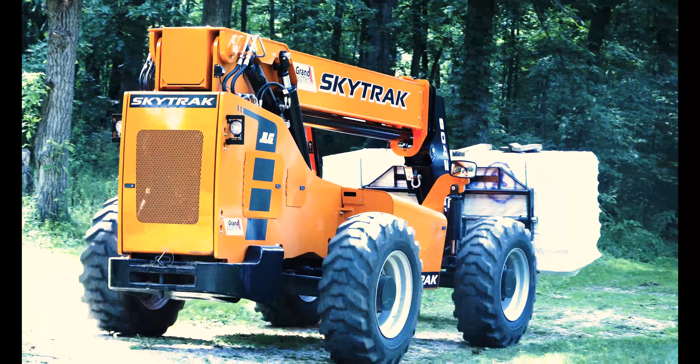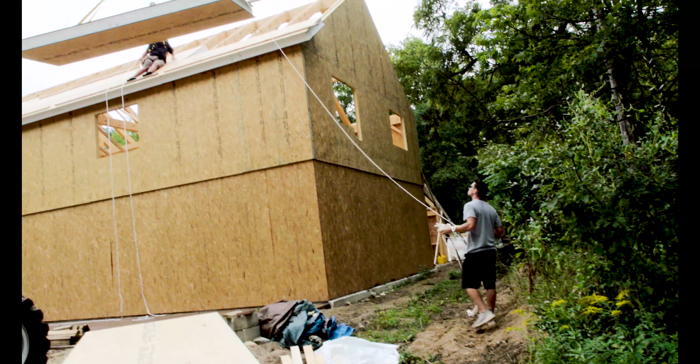The next step after erecting the timber frame is to install the structural insulated panels, or SIP panels. The panel manufacturer has provided pre-cut panels, a detailed panel layout plan, all the required adhesives, fasteners, foam, plywood splines, and, in some cases, lumber for edge blocking. In this video, we will go through the steps of installing the panels, review best practices, and offer tips and guidelines.

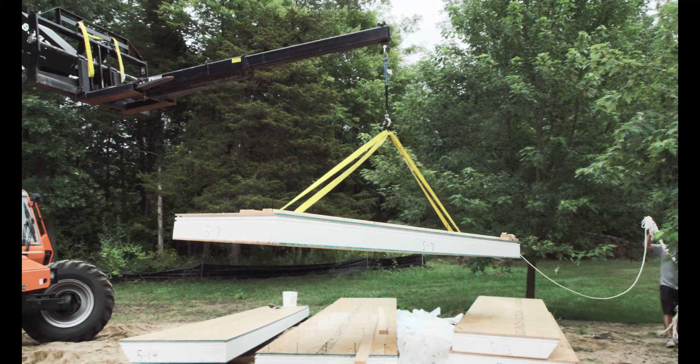A crane is the best option for installing, although the lower wall panels are effectively done by human power. With some ingenuity, the upper wall panels and roof panels can be done by hand as well. A lull with a boom attached, such as the SkyTrak used in this video, or an excavator may work well. But it depends on the height of the building, the skills of the operator, and the crew on the ground.

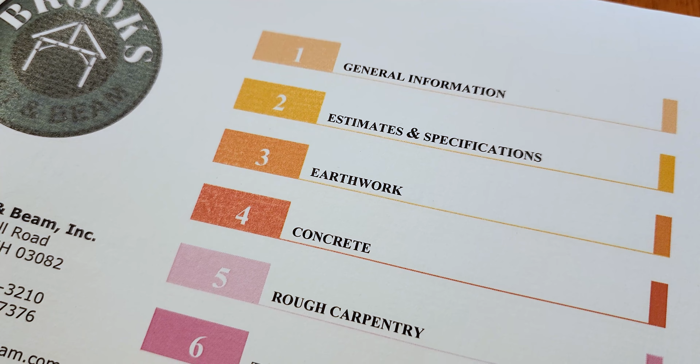The owner's manual contains extensive information about the panels, including panel types, construction details, finishing options, and building science recommendations for siding, roofing, window installation, and ventilation. You should be familiar with this information before starting on the panel installation.

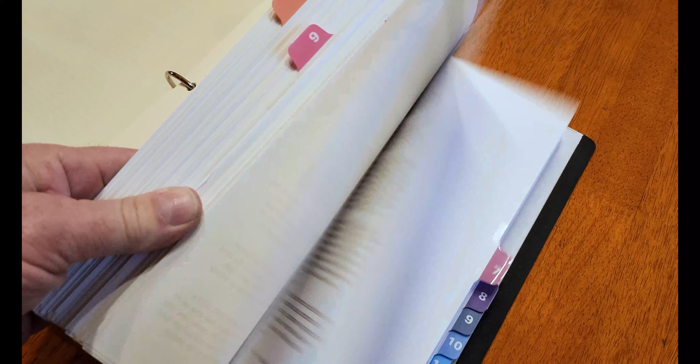In addition, your architectural plans will show building sections and wall sections which have specific panel details at the sill and eaves. And finally, the panel layout plan has at least one full page of specific details in addition to showing where each panel belongs in your building. Review the panel plans before you get started. Get familiar with the panel numbering and sequence.

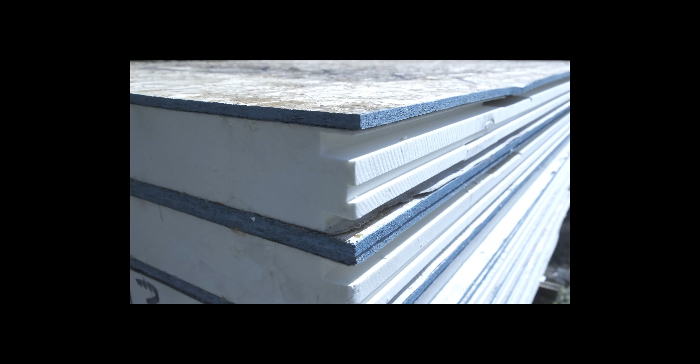You will receive several documents with your panel package. You should have a panel layout plan, which shows the timber frame outlines and the panel layout sequence. You will also have a panel pre-cut plan and a bundle list showing where to find any panel by bundle number. Each bundle of panels also has a contents sheet attached that shows which panels are in that bundle.

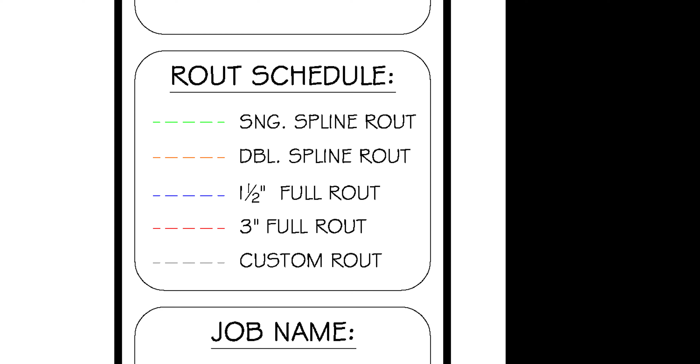The panel layout plan includes a 3D view of the project, which allows you a visual reference of the finished product. The drawing legend shows all abbreviations, line types, rout schedules, panel types, and panel identification tags. Understanding these abbreviations and tags will help you to quickly navigate the plan and identify the panels you need.

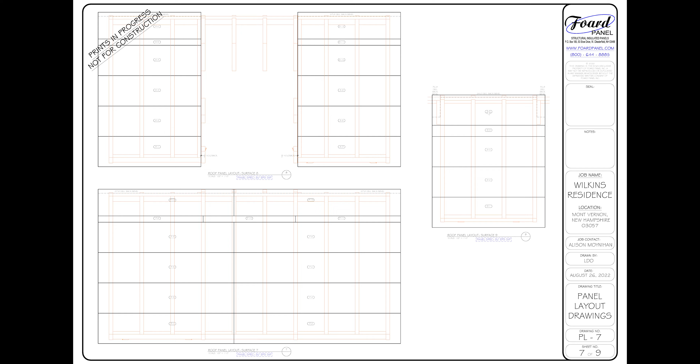The wall panel surface layout page gives you a plan view reference of the project with elevation tags for each face and arrows that tell you the surface number and on which page to find the panel layout. It also gives you a reference for where the panels join and overlap. Likewise, the roof panel layout page gives an overall view of the pattern and where the panels join. There may be an elevations page that shows the wall panels in elevation view.

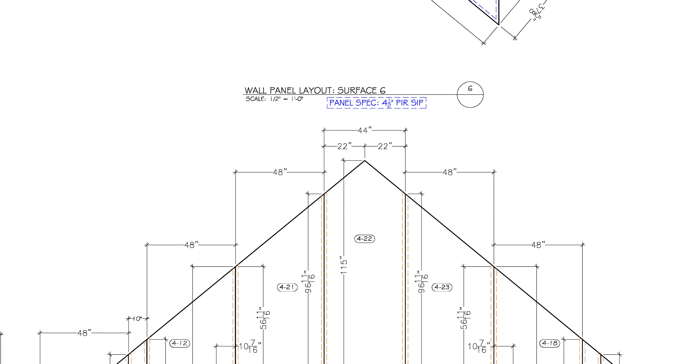After that, the detailed panel layouts are presented as surfaces with each panel number, window and door location, and panel overall dimensions. The timber frame is also represented in a lighter color line, so you can see where the panels go in relation to the frame. The roof panel layout page works the same way, with panel labels indicating the surface and number.

There will be at least one or two pages with construction details, showing how to construct the sills, joints, splines, corners, and openings. Pay particular attention to the red dots, which show the sealant applied to all foam to wood surfaces. There are details that specify fastener installation and spacing, how the corners are built, and how the roof meets the walls.

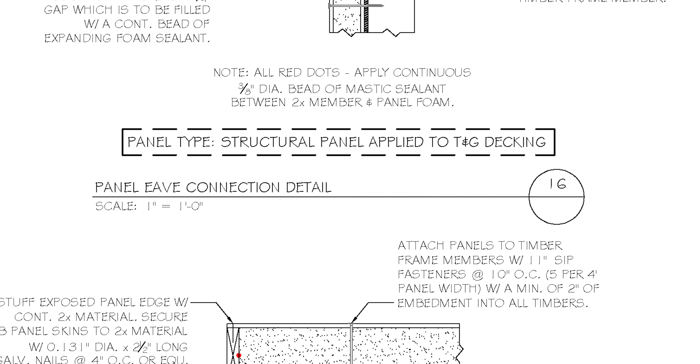There is a detail called Panel Eave Connection Detail that you will need to study. It shows the distance the roof panel extends beyond the outside of the wall panel. We will cover this in more detail in the roof panel section of this manual.

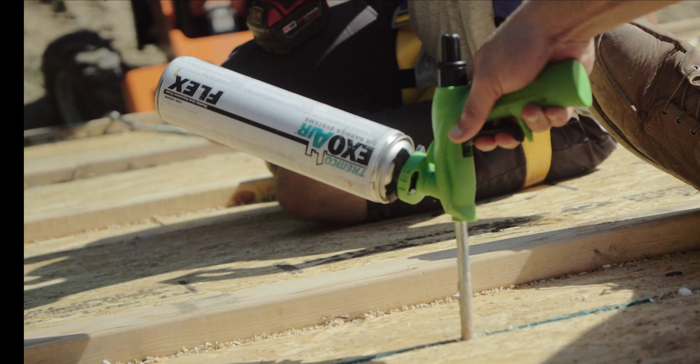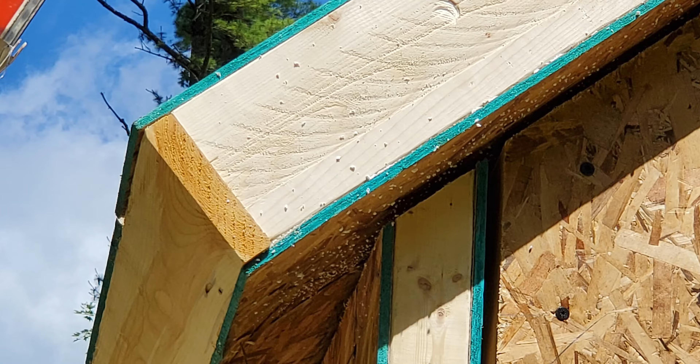There are two products that will be used to seal the panel joints: spray foam and panel mastic, or sealant. The spray foam is supplied with an applicator gun and is used to fill gaps in foam channels. A close look at the details for corners, eaves, rakes, and ridge will show a half-inch gap that is to be filled with foam. That gap may be wider because it is equal to the thickness of the furring or wall material applied behind the panels. On roofs, it is typically 3/4 of an inch, which is the thickness of 1x8 T&G pine.

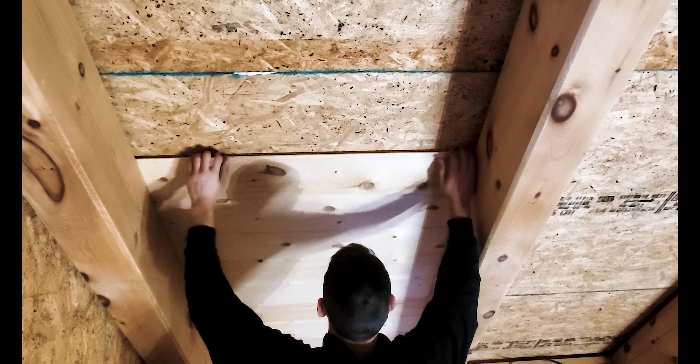All panel-to-panel joints on the walls and roof are sealed with foam, applied using the drill and fill method, which involves drilling holes at specified distances and injecting foam into the foam channel of the panel edges. We will look into this process in another video.

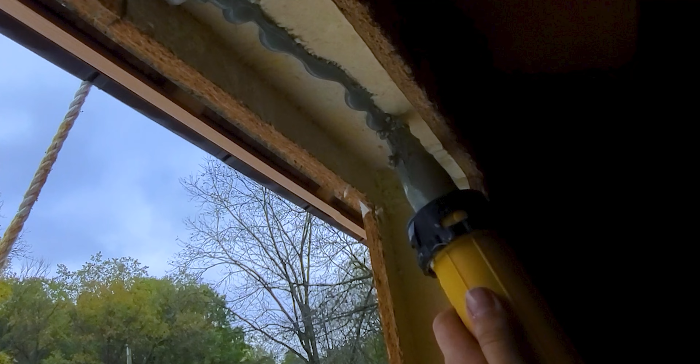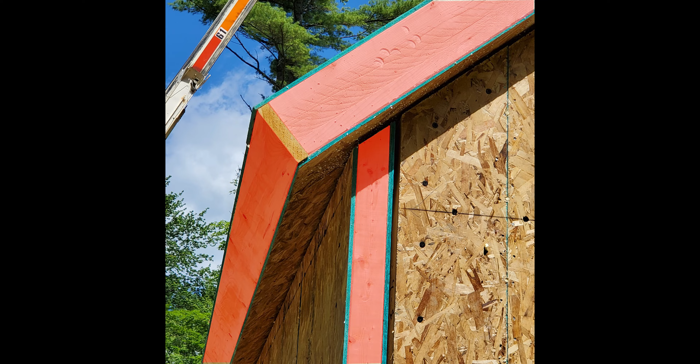The panel mastic is a special type of caulking made to bond to the foam core and is used to seal between any wood edge fillers, window and door fillers, and at the sill plate or on a subfloor. Anywhere the panel insulation meets wood in direct contact should be sealed with panel mastic.

Another use for the panel mastic is joining field cut panels. Wherever a panel scrap is used, the cut will not have a foam channel. Lay 2 beads of panel mastic on the edges and push tightly together to make a good seal.

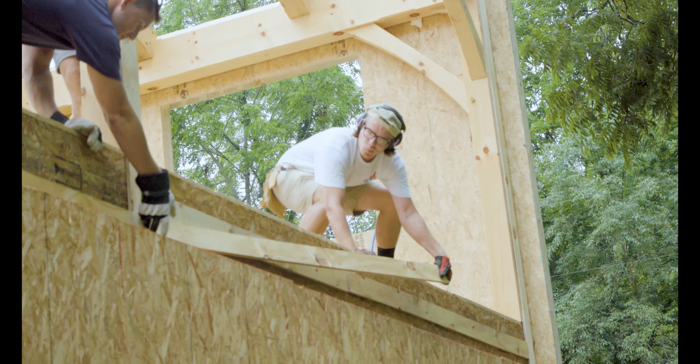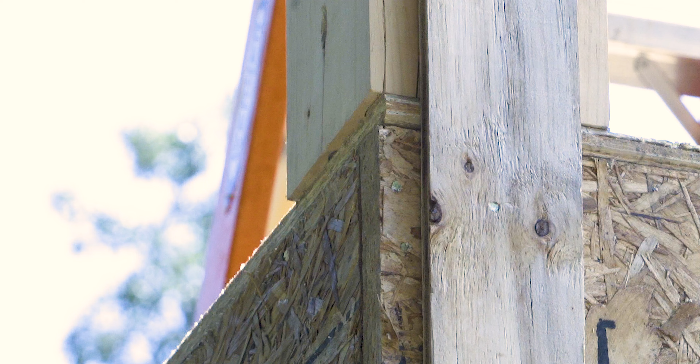Before installing the panels, you will need to pre-install the drywall or install furring strips, which will allow drywall installation later. In any case, the face of the timber frame should be flush to the face of the rim joist at every post, but this doesn't always happen. Being that the wall panels will be screwed along the bottom edge into the rim joist just above the sill, the ribbon band or furring strip should be nice and straight all the way to the sill. If not, the panel bottom will be pulled in or bulge out at the bottom, creating problems for the siding and exterior trim. Check this using a straight edge.

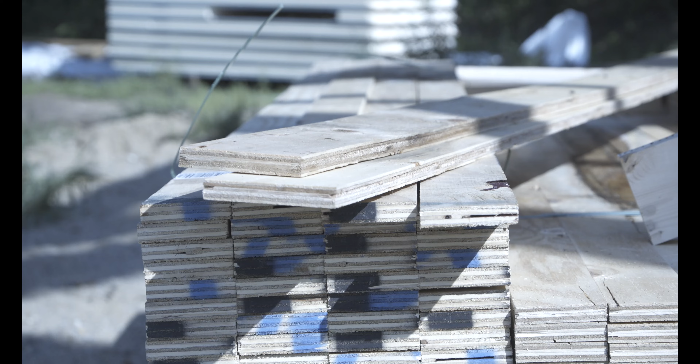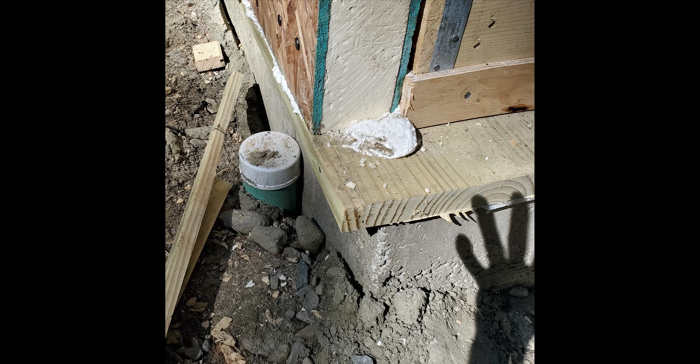If the wire chase gap is greater than 3/4 of an inch, you can use thicker stock or layers of thinner stock. If there's a severe taper, you may want to rip some 2x stock on a taper to match. If you have used a 2x12 for your sill and left it wide, now is the time to measure it out 4.5 inches from the chalked line and rip it off. If the remaining dimension is less than 4.5 inches, you will need to build out the edge so it becomes flush to the panel face.

Before any panels go up, you also need to install wires for any exterior floodlights or other fixtures that you may want. There is detailed information on wiring in the wall panel and roof panel installation sections of your manual.

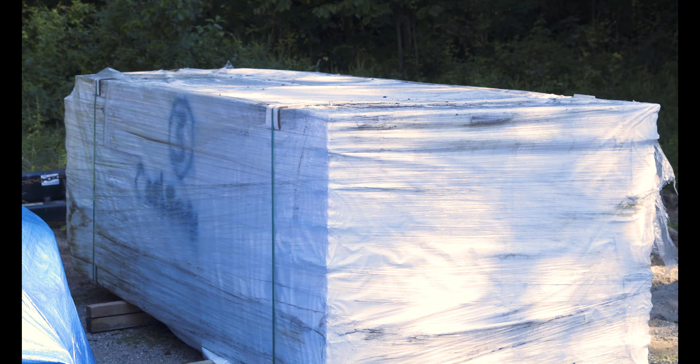Panel installation day has arrived. You may begin with a gable or an eave wall. It's up to you. If a wall has a lot of small cuts for some reason, save that wall for last, which will save time in digging through the piles looking for the cut panels.

Some wall panels can be installed by hand, with 2 or 3 workers moving the panels into position, placing the bottom edge on the sill plate and tipping the panel up into place. This is fine as long as you have a good level surface to walk on and easy access to the materials. It's more likely that you'll need to lift at least some of the panels and definitely all of the upper panels with a crane, lift, or extra manpower and ropes. The tools you'll need to have on hand are listed in your manual.

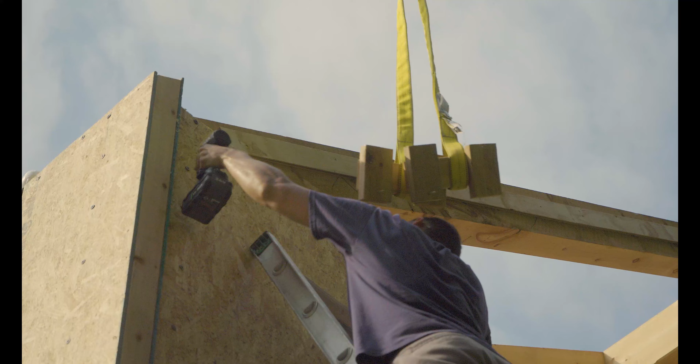The best place to start is on a corner. One face of the corner will have the panel flush to the frame and the other face overlaps. It's usually easier to start with the face flush to the frame. The panel numbering sequence will start on one end, usually left to right, and it makes sense to start there. Mark the edge of the starting panel on the panel ledge before laying down the bead of sealant. You should only lay out as much sealant as you can cover with the panel you're installing. Don't get too far ahead with the sealant, it gets messy.

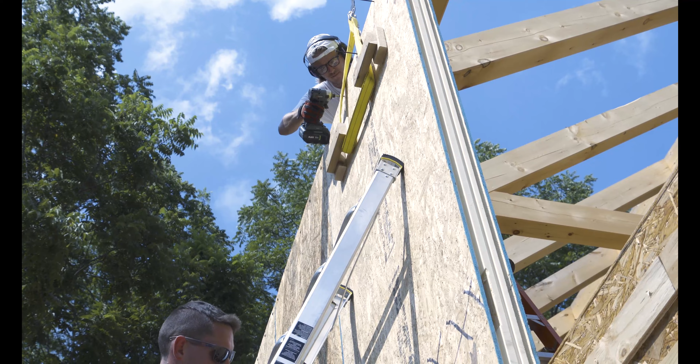Find the chosen panel and put it on sawhorses near its final destination, exterior side up, with the foot of the panel facing the building. Look at where the panel will land on the frame. Wherever it contacts the frame, you will be inserting screws. It's a good idea to start the screws in advance to save time and help get the panel secured quickly.

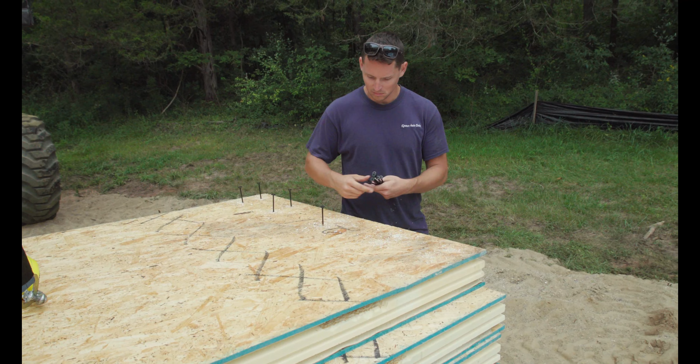While the panel is on the horses, mark out the location of the ribbon band, any posts, and the upper beam or tie. Position the screws, use 7-inch screws for 4.5-inch panels, along the bottom edge, through the ribbon band, the top edge, a beam or tie, and into any posts that the panel may land on. Check your panel plan for exact details on screw spacing.

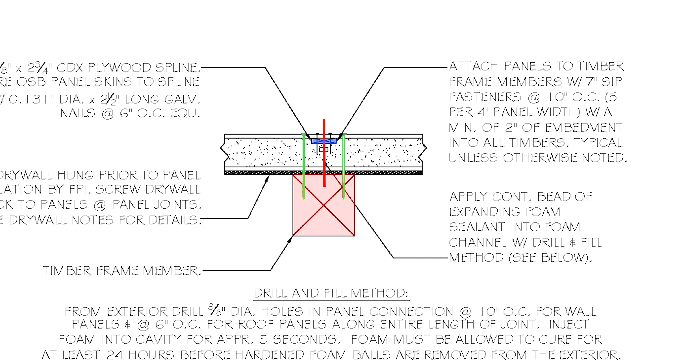Screws are usually 10 inches on center, so 5 across the bottom and 5 across the top. If the panel is half bearing on a post, keep the screws 2 inches from the edge. They need to miss the groove for the spline, but hit the post. You might want to angle these screws slightly.

If there is a knee brace, you can lay it out to get 2 screws in it. Note that the screws are pre-positioned on the ground before standing the panel. This saves time and makes ladder work safer.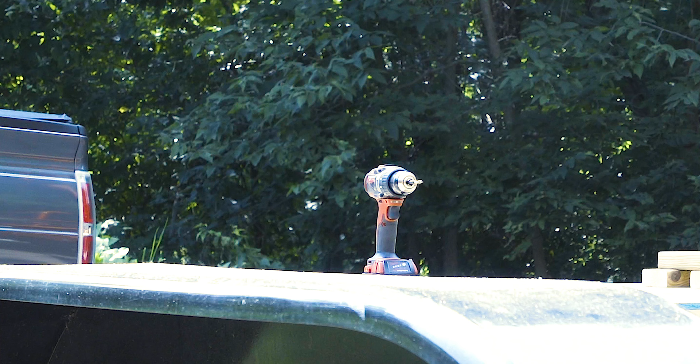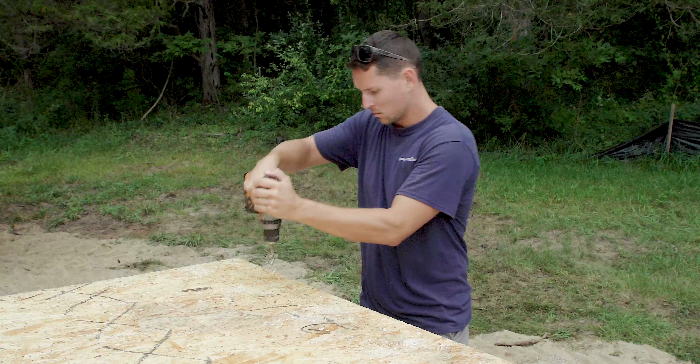Some people prefer to simply drive the screws with a drill or driver. Others have found that starting the screws with a hammer speeds up the process. Or you can drill starter holes for each screw. Some builders find this quicker and easier as the screws tend to vibrate and bounce when hit with a hammer, depending on the hardness of the OSB used on the panels for each building.

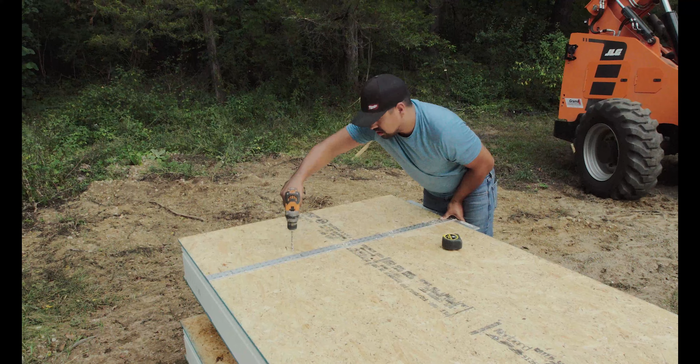We simply laid a scrap piece of furring strip across the panel and drew a line before drilling. The furring strip is just the width needed to put the line where it needs to be, without measuring each time. Or use a drywall square at the position needed and drill along it, or mark a line along the square and drill on that line.

Then, just push the screws into the foam at the angle needed, and they will be held in place for when you're on a ladder or leaning out in the air, and only have one hand available to drive them in with your drill or driver. Remember to use the supplied 7-inch screws for the 4.5-inch wall panels. The longer screws supplied are used on the thicker roof panels.

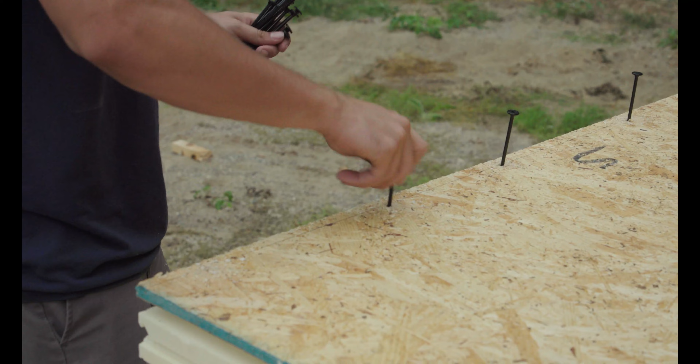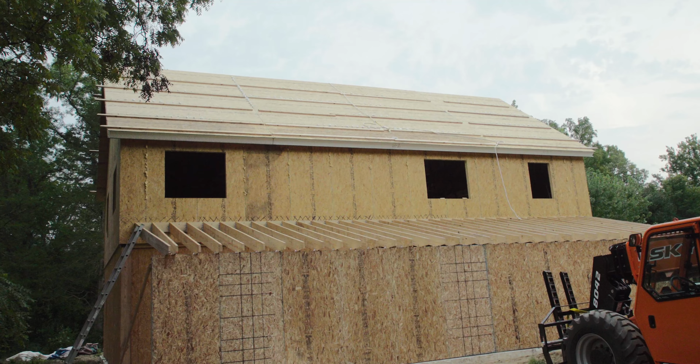Splines are strips of plywood or OSB that are supplied in a bundle and are used to join the individual panels together to create a continuous surface. The spline is inserted into the channel cut for it by the factory. Most installers find it easiest to put up 2 or 3 panels, then go back and slide the vertical splines down into the slot from above. Make sure the slot is completely filled. The splines can be screwed or nailed with a nail gun to finish.

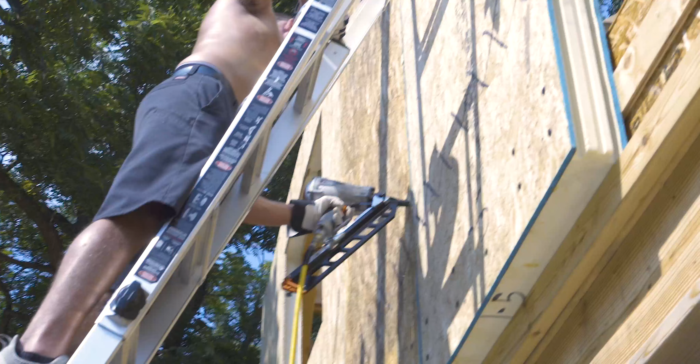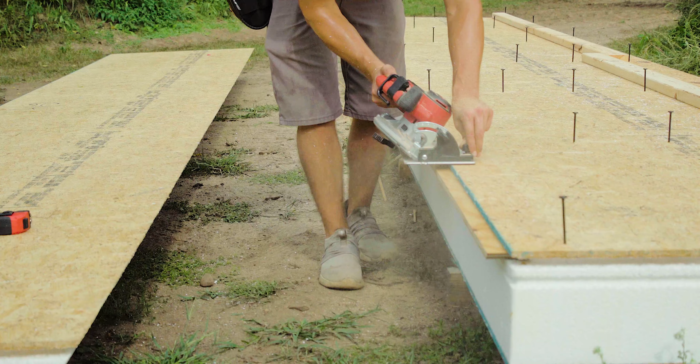Sometimes it's helpful to screw one edge of the spline into place in the panel while it's still on the ground, pulling it up flat to the backside of the panel OSB. This aligns things so that the next panel slides right over the spline without jamming. Other times, it's best to leave the spline loose and jiggle it into place. Also, running a power plane or circular saw down the length of the spline on a 45-degree angle, beveling just the corner of the spline, helps the spline to slide into the next panel.

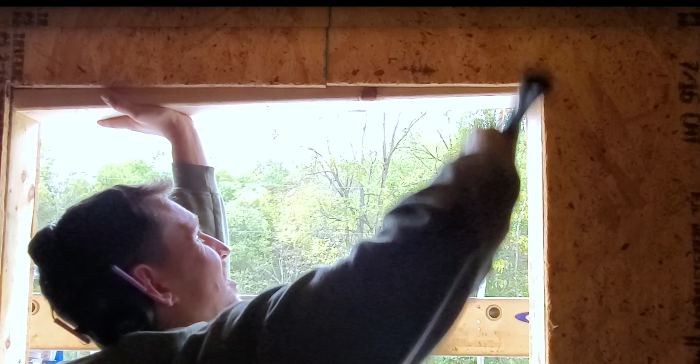At windows and doors, make sure the spline is down to the bottom of the foam route, not the edge of the OSB opening, or it'll be in the way of the 2x you'll insert later. Note how in this photo, the vertical spline is pushed all the way into the foam groove to leave room for the horizontal spline to cross above it. Note the edge is beveled for easier joining with the abutting panels. If there's a horizontal seam at the top of the panel, make sure that the vertical spline is below the bottom of the horizontal groove.

In some cases, the splines are not accessible after the panel is installed. On the gable ends, the wall panels are usually stacked on top of the other. In that case, the spline must be attached ahead of time. You don't have to nail or screw the splines right away. Most installers find it faster and more productive to leave that part until a section is complete, or even until after all the panels are installed.

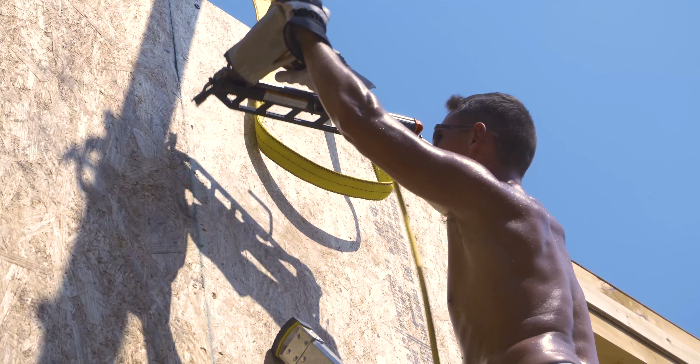This way, if you need to make an adjustment or fix a mistake, the panel screws are easily backed out and the adjustment can be made. It's better to make sure everything is just right than go around and button up the panels with a nail gun or screw gun. It's much harder to fix something after the splines are nailed off.

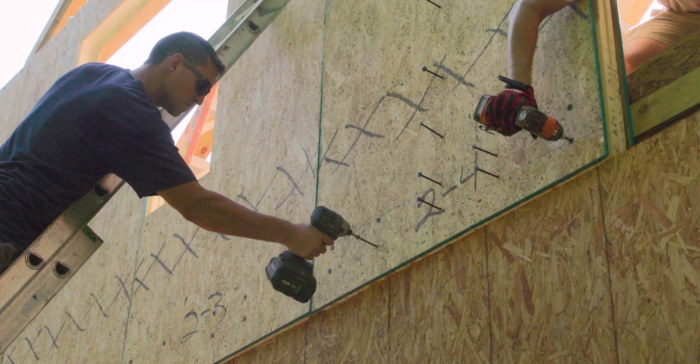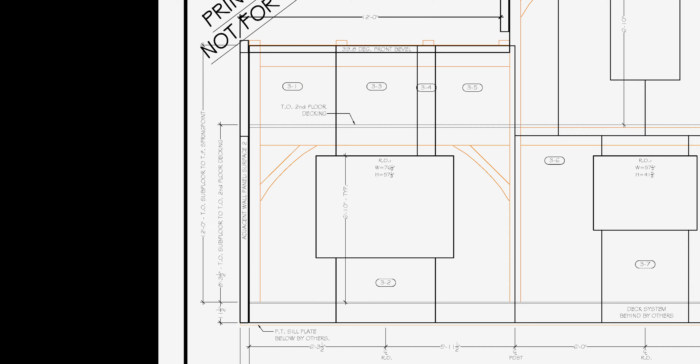Start on a corner and determine if the panel will extend past the corner or be held flush. For the first panel on a wall, you should have marks on the panel ledge to position the panel. You will need to put some goo on the ledge to seal it. Using the sausage gun, lay a tall bead of panel adhesive the length of the panel location. Have a flat bar, a mallet or hammer, and a level handy, as well as an impact driver with the proper bit.

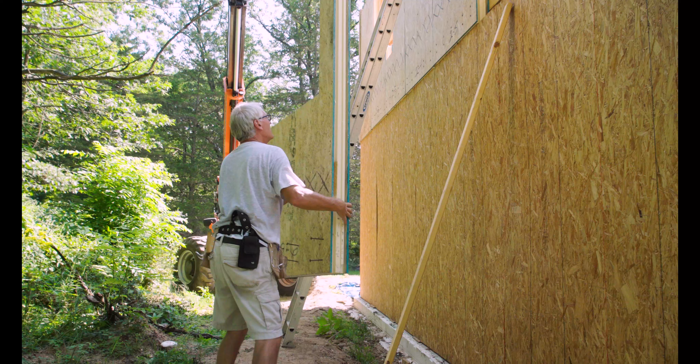2 people should be able to handle the panel on the ground level. They should be on either side, mid-span. Pick up the panel, either by hand or by machine, and walk the bottom over until it bumps the ribbon band. Then lean the panel up and hold it against the wall.

While one person is holding the panel against the wall, the other can be tapping the panel to the layout marks on the ledge. Holding a 2x4 against the OSB will prevent it from crushing while tapping. Now the panel needs to be leveled. Determine which side of the panel is high and drive the lower corner screw on that side.

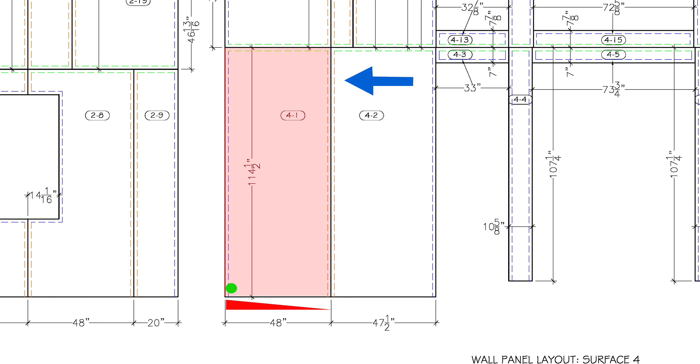The top of the panel can be moved over by inserting the flat bar under the low side. If it is a small adjustment, the top of the panel can be nudged while checking with the level. When it's good, drive a couple screws, then stand back and check that it fits the way it's supposed to.

If it goes up to the roof line, the angle cut on the top should be about a ½ inch below the top corner of the beam. This allows room for a foam gap under the roof panel. Screw the board holding the lift straps into the OSB face of the panel about half of the distance between the center and top of the panel.

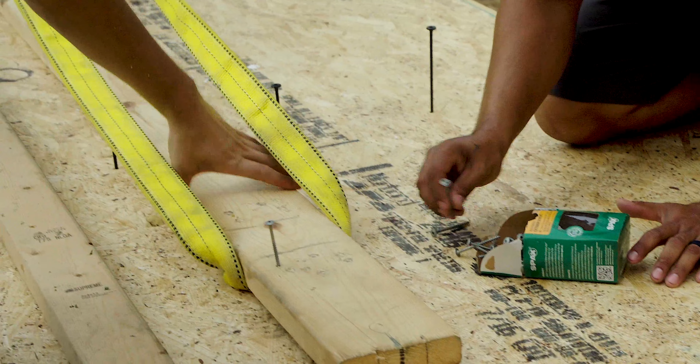This shows how one home builder used some blocks which their carpenters fabricated on site. The blocks were convenient for reaching the screws from the edges of the panels in difficult situations. Either way, be sure you have screws with threads actually in and through the OSB. Use robust screws such as GRK 5/16 by 2½ inch long.

The panels are relatively light for their size, but having one damaged by dropping to the ground, or more importantly, having someone get hurt, is not worth the risk created by saving a few seconds in setting plenty of screws. You can also lift a single panel with straps held to the panel by a 2x4 or 2x6 with 6 screws.

If you have pre-assembled 2 or 3 panels on the ground, use a long 2x6 for the straps and screw the board into each panel to keep the assembly from flexing in the air. You can also attach a rope or strap to hold the panel steady as it's lifted into the air. Or, a long 2x4 can be useful to steady the panel and then push the bottom of the panel to where it needs to be on the sill plate.

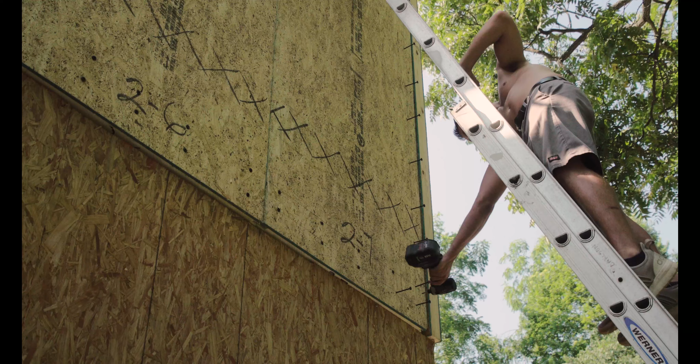Leaning a tall ladder against the panel also helps to stabilize it while the first 2 or 3 screws are driven home. At this point, you can insert splines into the slot, pushing the spline down from above. If the panel bears halfway on a post or beam, do not drive the screws so much that they constrict or crush the spline groove.

The plywood splines can be installed in their groove when the panel is up. If there's a horizontal seam at the top of the panel, make sure that the vertical spline is below the bottom of the horizontal groove. On the gable ends, the wall panels are usually stacked on top of the other. The horizontal seam should already have a spline in it.

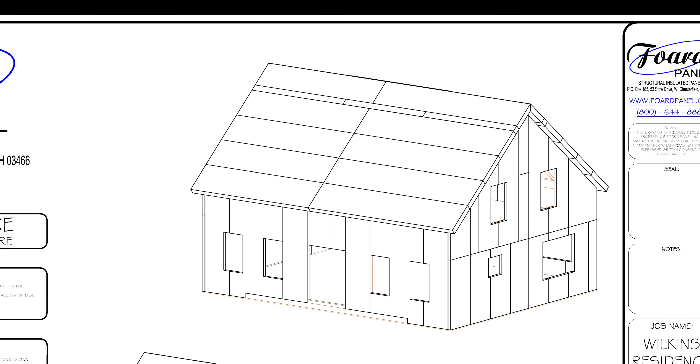The first panel to be installed on the roof is the lowest. It will run horizontally and usually has an overhang. There is a detail in the panel plans titled Panel Eave Connection Detail. It should have a dimension for the overhang from the face of the wall panel. Trying to measure that distance while the panel is in the air is way too difficult.

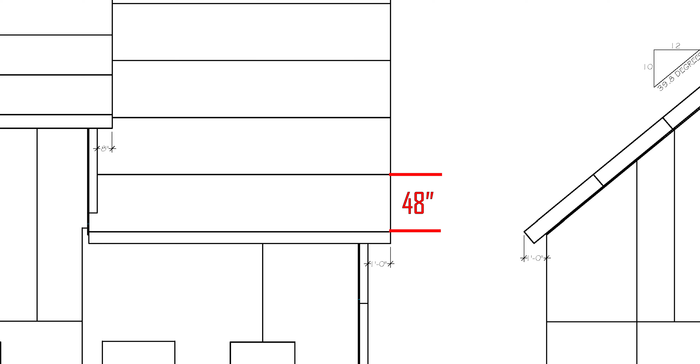We usually make a full-size layout of that detail on the face of a panel, a large flat surface, and get a measurement from the outside edge of the frame to the lower bottom edge of the roof panel. Usually, the lower panel course on the roof is horizontal and full width, 48 inches. Deduct this measurement you just got off the layout from 48. That's the distance from the edge of the frame to the top edge of the panel.

But don't rely on this measurement alone. There is another measurement to check first. On the panel detail page, look for the panel ridge connection detail. You'll see that there's a gap at the peak where the panels from each side meet. The gap is wider at the top and touching at the bottom where the panel rests on the rafters. The wider top gap is for spray foam.

You'll need to find one of these panels with the ridge cut and pull a measurement on the bottom face, which rests on the roof. This measurement is then transferred to the roof face, where it's compared to the overhang measurement from the eave connection detail.

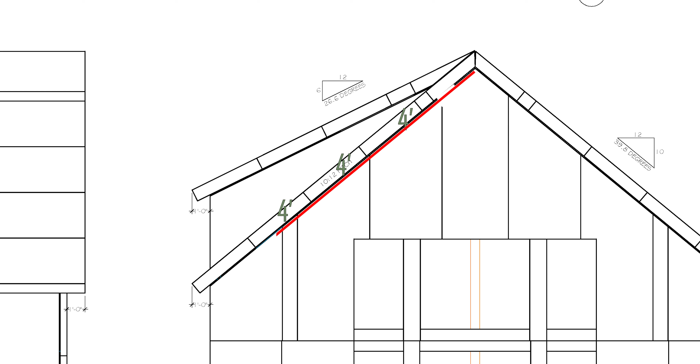If your roof panels are all running horizontally, you'll need to add up the number of panels by 4 feet to get the total run from the center of the ridge to the top edge of the first panel. You can also refer to the panel pre-cut plan, which shows the location of the back cut line and the dimension from the edge.

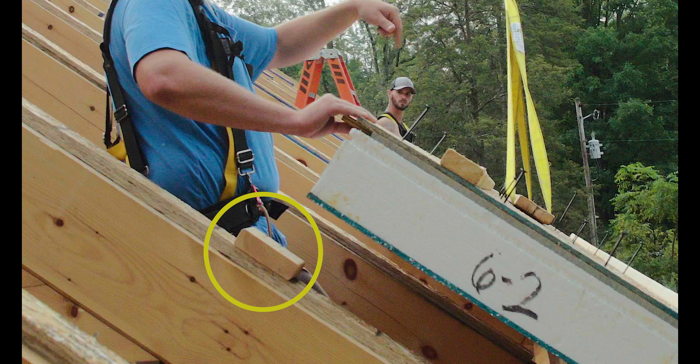Scrap 2x4s are nailed to the rafters as a guide for the first roof panel. The first roof panels will be pushed up against the 2x4s and screwed into place. Prepping the roof panels is much like the wall panels.

On the top side of the panel, lay out the other rafter locations and preset the screws, keeping them out of the spline slot. If you've installed furring strips, like shown here, start the screws on the center of the beam, which would mean the screw is also driven through the center of the furring strip. Check your panel plan for exact details on screw spacing. Screws are usually 10 inches on center, so 5 across the bottom and 5 across the top.

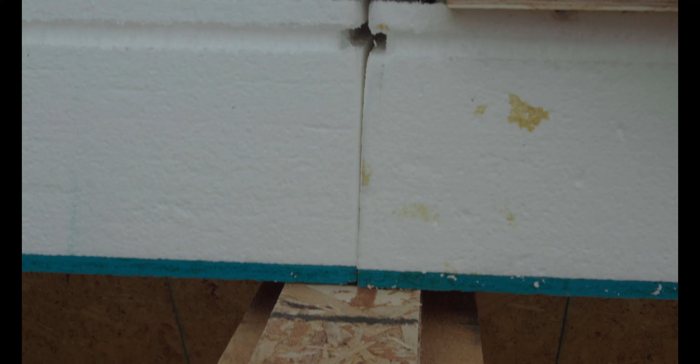If the panel is half bearing on a post, keep the screws 2 inches from the edge. They need to miss the groove for the spline, but hit the post. You might want to angle these screws slightly. Do not drive the screws so much that they constrict or crush the spline groove.

For lifting the panel, use 2 of the seatbelt straps threaded on a 2x4 or 2x6, then screwed to the roof panel about 2/3 of the way up the panel. Use at least 12 robust screws, such as GRK 5/16 by 2.5 inches long. The roof panels are much heavier than the wall panels, so don't skimp on these screws.

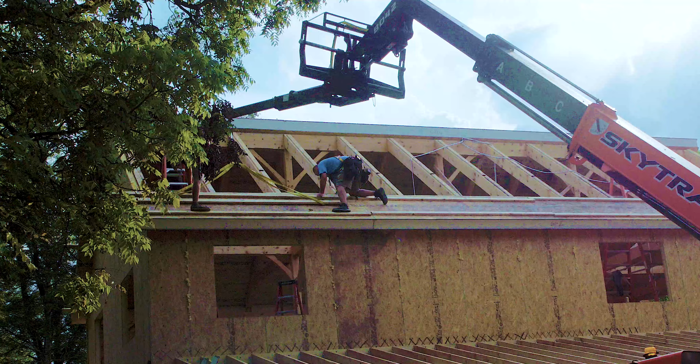Also, nail or screw on 2x4s along the bottom edge to provide some footing. You'll be standing on this panel to land the one above it. You might also find it convenient to temporarily screw the splines to the surface of the panel so they are near at hand after the panel is in place.

After the first row is installed, the remaining panels will rest easily on the first row. Now is a good time to double-check the remaining distance to the ridge and make any adjustments. Structural panels usually run horizontally from end to end, with the panels laid perpendicular to the rafters. Referring to the panel layout plan, start with the bottom row and work your way to the top.

You can set the splines in place on the lower panel and slide the upper panel down over it. Leaving the spline loose will allow you to wiggle or work the spline and panel into alignment. As you work up the roof, check your measurements for the remaining distance. The bottom face of the last upper panel should be right at the top center of the ridge beam.

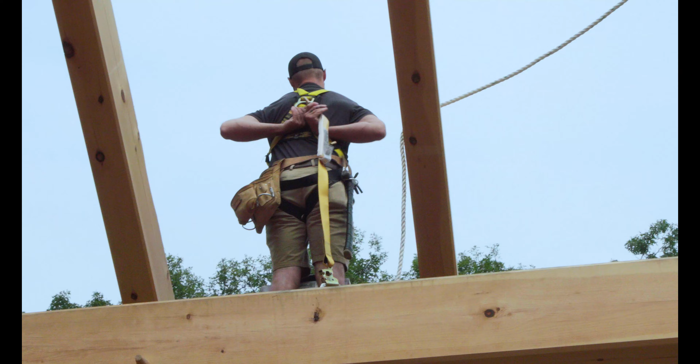Time is usually a critical factor when installing the roof panels. Many times, a crane will be hired for the day, and possibly extra help as well. There are ways to save time. As long as the first eave panels are secure, the splines can be left loose, and the remaining panels can be placed with a few screws each. After all the panels are in place, you'll have more time to screw everything down and nail off the splines.

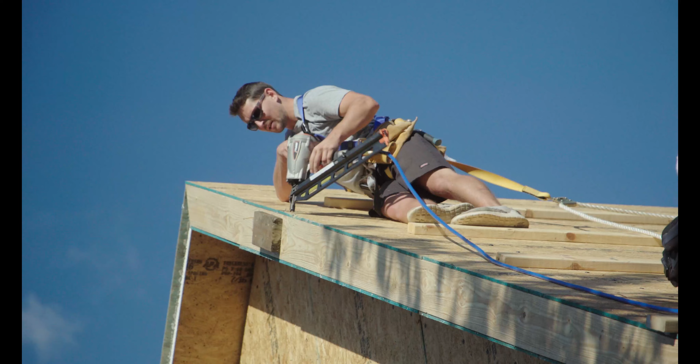Once that's complete, you'll drill and fill the roof panels in the same manner as the walls. Refer to the plan details. Roof panels are drilled 6 inches on center. Inject the foam, then get off the roof till the next day, when you can easily scrape off the excess hardened foam.

All exposed panel edges will be stuffed with wood blocking, depending on the wall and roof panel thickness: 2x4s or 2x6s in the walls and 2x8 or 2x10 in the roof edges. All blocking must be the full length of the panel edge and must be one continuous length wherever possible. On the edges of the roof panels, do not allow the blocking joints to fall on or near the panel joints. Offset them by at least 2 feet.

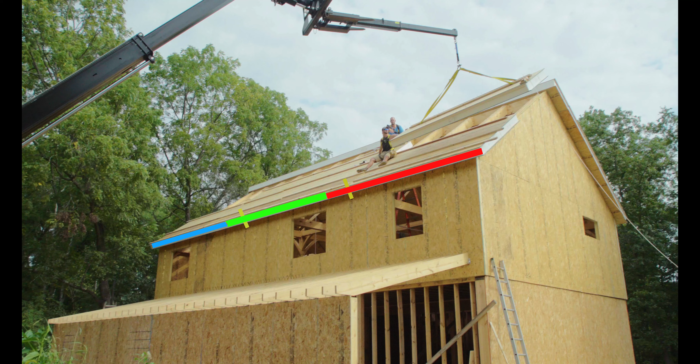Anywhere you have foam to wood contact, put a bead of sealant. A bead behind every 2x is the rule. See plan details for panel mastic application, indicated by a red dot.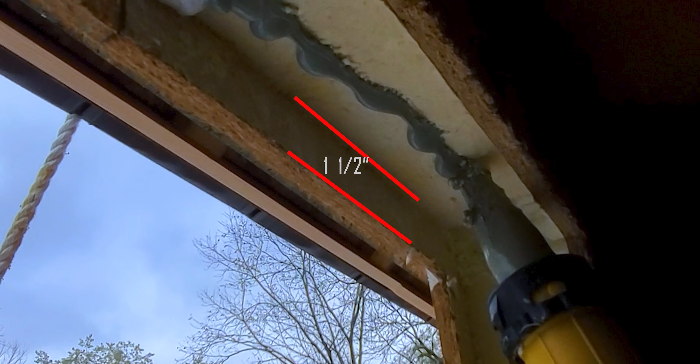All window and door openings have the foam cut back 1.5 inches. This space will be filled with 2x4s or 2x6s to stiffen the opening and provide nailing for the window and trim. Before you insert any 2x's, make sure all the splines are installed above and below the window opening.

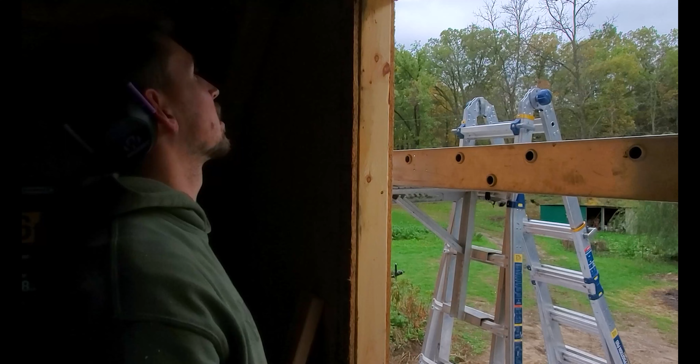The foam at the corners is rounded, so you can either chop the rest of the foam out to make a square corner, or simply cut the 2x4 a bit short and fill the gap with expanding foam. At this point, you can nail through the OSB into the 2x or screw the drywall side.

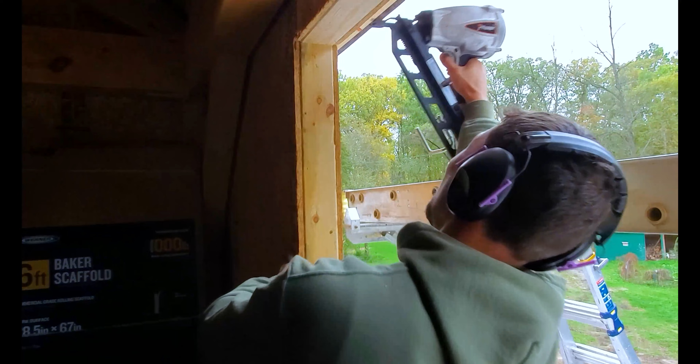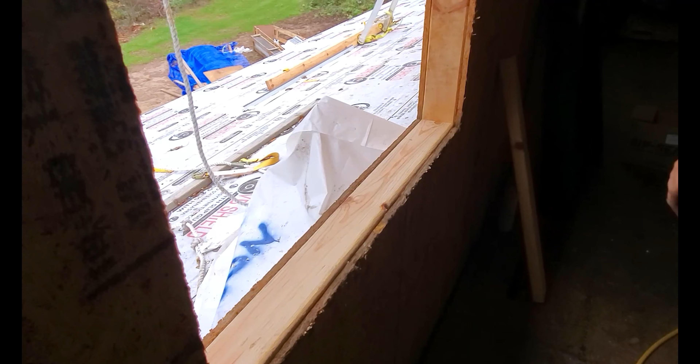Some builders like to tilt the bottom sill board at 5 degrees toward the exterior of the wall. Just make sure to have the exterior of the sill flush with the exterior OSB so that the window will fit in the opening. Then, you may want to caulk or tape the opening to keep rain out of the panels. Rain will soak down into the foam and will take quite a while to dry out. You can also cover the entire opening with plastic until you're ready to install doors and windows.

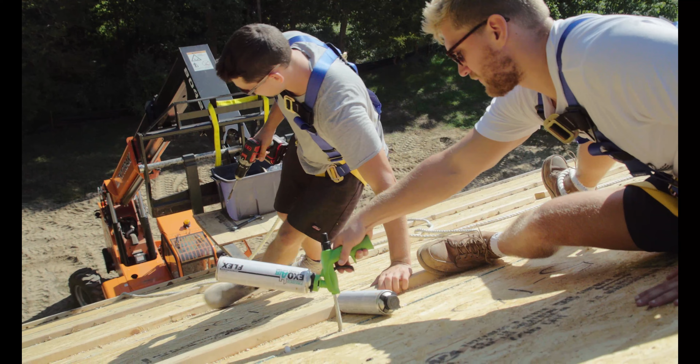After the panels are installed, it's time to seal everything up. We recommend waiting until all the panels are installed, just in case you need to make any adjustments or changes. Save the foaming until after the roof is on. The foam is very messy and sticky, so it's best to do the entire wall, including the foam gap just under the roof panel, all at the same time.

There will be a panel plan detail which shows the drill and fill technique. You will be drilling 3/8 inch diameter holes every 10 inches along each of the panel seams, through the splines and into the foam channel. Make sure your drill bit goes in at least as deep as the channel. Deeper is fine.

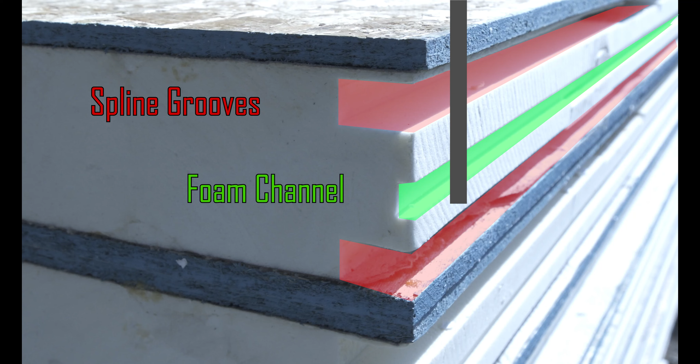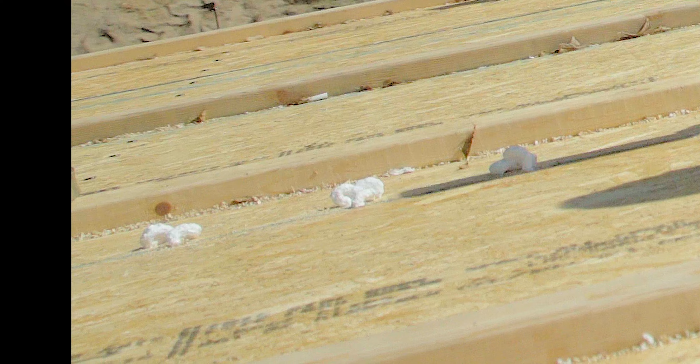The foam will expand lengthwise into the channel. Stick the nozzle into the hole and count to 5. Then move on to the next hole. Foam will expand back out of the holes. Don't touch it. Let it dry for 24 hours when it can be easily scraped off. As you start filling the next hole in line, you'll see the foam start to push out of the previous hole. That's a good sign. It means the foam channel is filled.

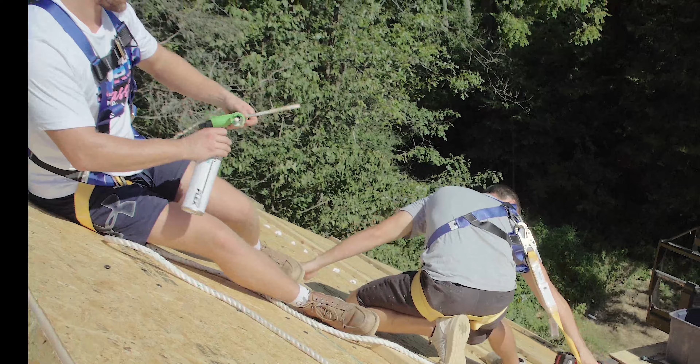The foam gun has an adjustment knob on the end of the barrel. This is used to vary the size of the nozzle opening. It should be rotated counterclockwise a couple of turns to wide open when filling drill holes. When you're foaming open gaps, the flow rate can be reduced as needed to make the job more manageable. In between uses, simply rotate the knob clockwise to close the nozzle.

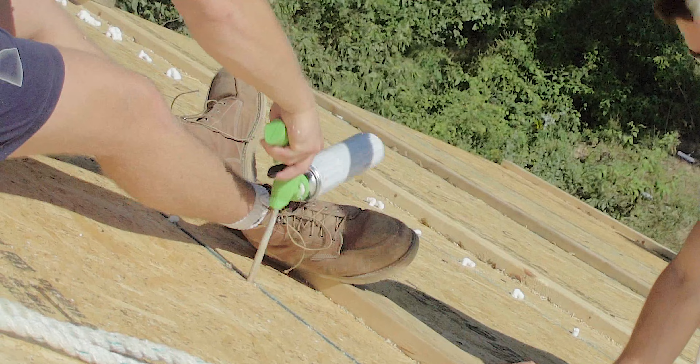Do not remove the can even when empty, unless you immediately replace it with a new can. Never leave the gun without a can installed. If the nozzle is shut between uses and a can is attached, the cans will remain good for many weeks. It is impossible to clean hardened foam out of a gun, and it only takes a few minutes for this to happen. Keep the can on the gun.

The top angle of the roof panel is deliberately cut a little wide to create a gap which will be filled with foam. Roof panels are drilled 6 inches on center. You'll drill and fill the roof panels in the same manner as the walls. Refer to the plan details.

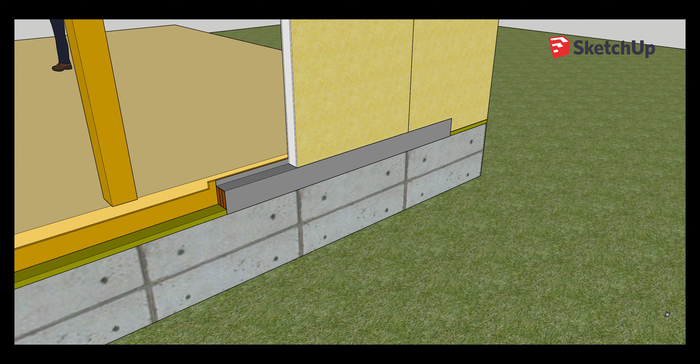On exterior deck locations, solid blocking is installed continuously wherever an exterior deck or porch will be attached to the house. This detail is shown on the plans and in the owner's manual as detail D1 or D1A. The panels will come pre-cut to fit around this blocking.

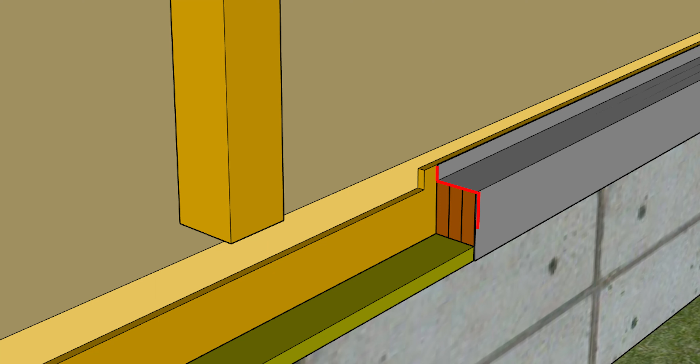Before installing the panels on top of this blocking, it's a good idea to wrap some peel and stick membrane, ice and water shield or similar over the blocking, lapping up onto the rim board and down over the edge of the sill or panel shelf. Make sure the plywood rim furring is behind this blocking and at least 1 inch beyond the edge. Later, put a layer of membrane over the blocking prior to installing the deck ledger, and then flash the deck framing.

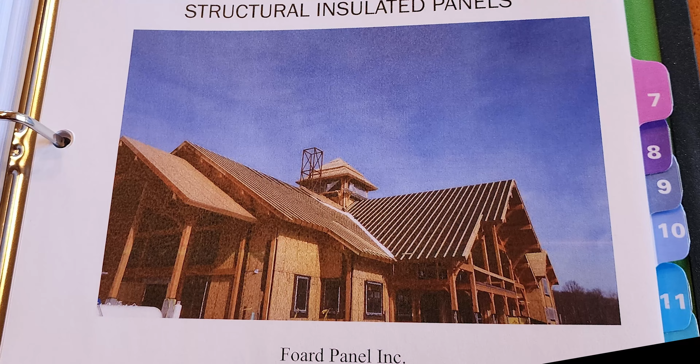We strongly recommend a vented roof system for all houses. The owner's manual covers vented roofs in detail, and your plans will have specific eave and rake details for your project. Do not consider this as a needless expense, but rather as cheap insurance.

Regardless of how carefully the panels are sealed and finished, over time, small hairline gaps will open up and moisture will migrate from inside the house through those cracks. A vented roof allows the moisture to dissipate harmlessly. It also keeps the surface of the roof cool in the summer, which prolongs the life of your roof. We feel that a vented roof is not an option, it's a necessity.